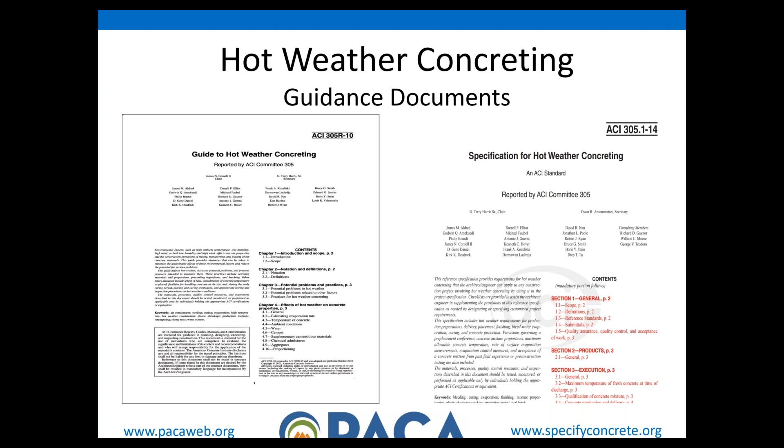What we based everything on here in the presentation, and what really is the guide, is the ACI publications 305R, Guide to Hot Weather Concreting, and 305.1, specifications for hot weather concreting. These are important documents. My advice to you, whether you're a producer, a concrete contractor, or a specifier, is the first time you're reading these documents should not be when you're preparing for a dispute and trying to get paid, or in a trial because you didn't do something right. Somebody once said, who reads these specifications? Well, only two people: lawyers and expert witnesses. So we've provided links to these documents. Of course, they're not easy to get to, but if you're doing something that's contrary to the guide, or somebody's asking you to do something that's contrary to the guide, it's good that you know where the answers are and what information we're basing all this on, where the state-of-the-art practice is coming from.

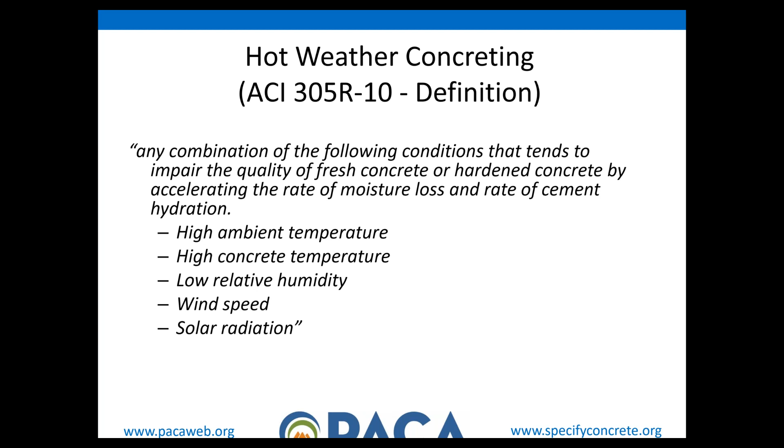So right from 305R, what's the definition of hot weather concrete conditions? Well, any condition that's going to impair the quality or change the performance of hardened concrete, including high temperature, high concrete temperature, really low humidity, wind speed, or a lot of sun. All those things are going to affect the concrete performance, how it performs, and what we need to do to address it properly.

Let's talk a little bit about the effect of high temperature on concrete. This is one of my favorite slides for relaying this information, both on hot weather and cold weather.

What you see here is the effect of the same mix being cured at three different temperatures for a total of a year, out to 365 days, all from the same concrete. They did this at a 0.43 water cement ratio, very typical of what you'd see in a 4,500 or higher performance mix, like a bridge deck mix. So this is relevant, real concrete.

What's important about this slide is to notice the shape of the curve. The shape changes when we get into that 73-degree range as opposed to 55 and 40 degrees. What that's telling me is that we are changing the mechanics of the chemical reaction that underlies cement hydration.

Now, cement hydration is not just one reaction. It's a very complex, multiple reaction with a lot of different stuff going on. If we wanted to put a webinar on that, we could put all sorts of chemistry up there, but that would be a webinar akin to being in a dentist chair for two hours going through all that chemistry. Hey, we're construction people, we don't like chemistry.

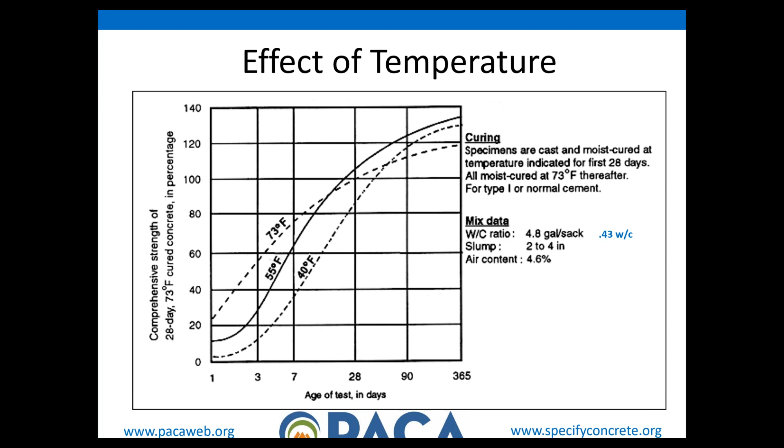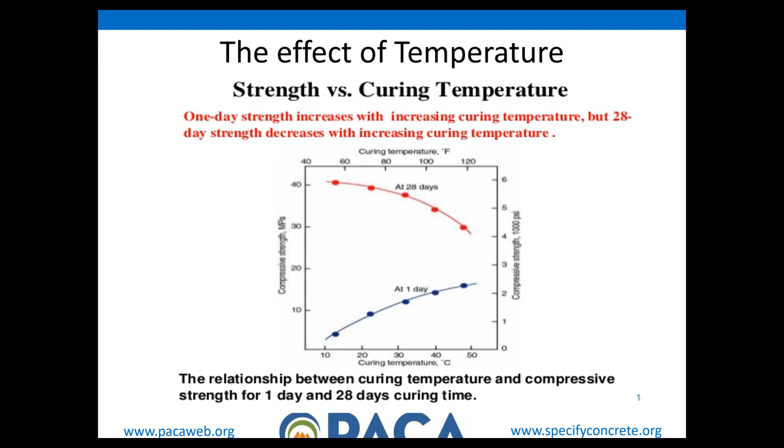Here's another way of showing the same kind of strength data. They say about strength of concrete, you want it early or you want it late. We can give you great strength at an early age by keeping it very warm, but we suffer 28-day and later strength by it. As you can see, the higher the temperature, the greater the 1-day strength, but the less the 28-day strength.

Now here's a very interesting slide, and let me see if I can do a little bit of notation on it. What you see in the brownish yellow color and in the blue color is the set times of two different mixes, both of the same proportions but with a different type of cement.

Notice that at 50 degrees here's our set time, and as we go to 73 degrees we get a much quicker set time, and as we go even to 90 degrees we have an even quicker set time. Same thing with this mix in blue, much faster setting time with a different type of cement, but as the temperature goes up, our set time goes down.

In addition to our set time, there's also something else that shortens or changes. Look at the difference between initial set and final set as our temperature increases. I'll asterisk that there, that's our time difference between initial set and final set.

Any even rudimentary finisher who's worked through the seasons knows that this window, our finishing window, changes as temperature is affected. So you see the finishing window here, and then it's even smaller here, and even less here as our temperature increases.

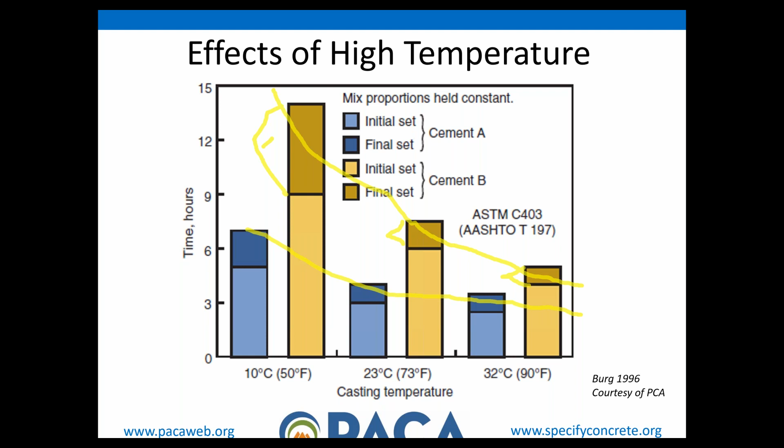So to me, this is showing another effect of temperature changing the mechanics of our underlying cement chemistry as it goes up. Let me get rid of these drawing tools, forgive me, I've got to erase all my drawings. So that's a little bit about the effect of temperatures on concrete.

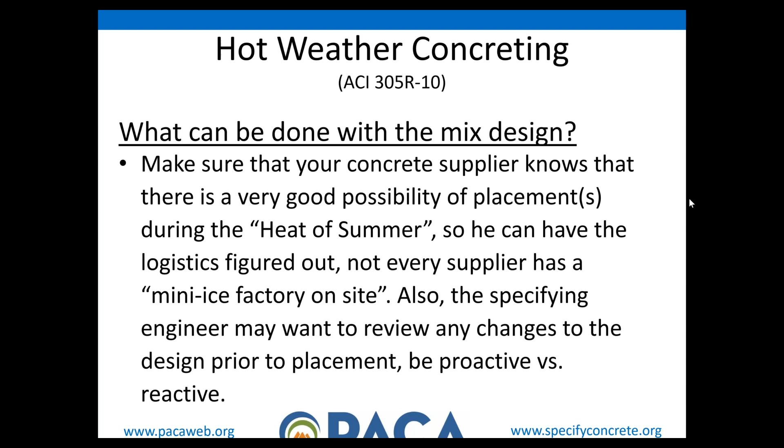Okay, we good, Jim? Looks good, Mark. Thank you. Okay, good afternoon everybody.

What can be done with the mix design? Well, not a lot, but there are some things you can do. I'll briefly go over some of these. The first slide I have here asks, what can be done? There's a little bit of tongue-in-cheek with that, as everybody can read, so I'm not going to read it for you. But the biggest thing, and Susan will touch on some of the challenges and logistics, is that summertime is a fickle time.

We have rain, as everybody's seen, and we have a lot of heat, and you're just not always ready. You get a call that you need a bridge deck here in 3 days. We got to ship a bridge deck. Not every supplier's got a little ice factory ready, so you have to have extra communication. You want to make a change, the specifying engineer is going to want to review it. So I just encourage everybody to be proactive, not reactive. I know everybody hears that same thing, but I truly mean it.

So moving along to our next slide, if I can get it to move along. There we go.

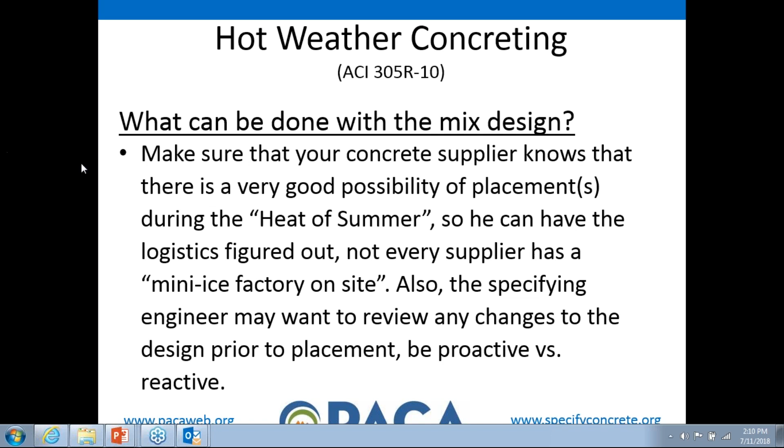What can you do with the meat and potatoes of the mix? Well, shrinkage is a problem, hot weather concrete's the problem, and they're related. The natural inclination is for everybody to add water, and that's done. Everybody in this business knows it's the kiss of death. By increasing your coarse aggregate volume, you actually require less water due to less surface area. It can really improve a mix, actually. Now, finishers are fickle people, and they don't like any more rocks in it than necessary.

So some of the other things we can do is use of chemical admixtures. They're the next best, and sometimes they even work in concert with the volume changes. They can really fill the bill.

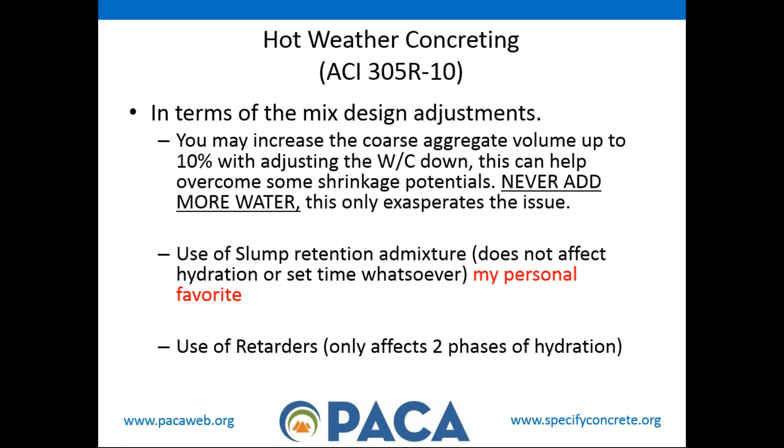Just want to point out slump retention admixture. It's a personal favorite. It does not retard the set of concrete. Okay, everybody, please understand this — it does not retard the set at all. A retarder, that'll affect the set of concrete, but retarders only affect 2 phases of the hydration.

There's a product called a hydration stabilizer. Everybody hears that, and some people think it's the same as a retarder. It is not. A hydration stabilizer can actually put your concrete to sleep for several days if need be. They're a more advanced product, used a lot, I guess, in pervious concrete, where you don't want things to set real fast.

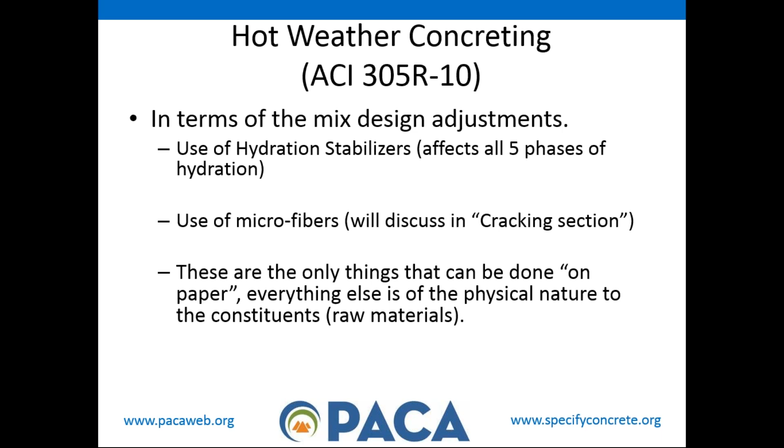Another item you can do with the mix design is use of microfibers, and we'll discuss that a bit in cracking further on. Microfibers or fiber mesh, or any of the other common names used, are really designed for plastic shrinkage cracking, and that's another issue we'll discuss further. So those are really the only things that can actually be done on paper.

Everything else is more of a physical nature or with the raw material. The raw material, first thing obviously is cement. Type 2 is good, there's a lot of 1-2s out there. Type 4 is the best, but you're not going to find that very easily, if at all. Jim, you or Susan can correct me — I don't know of anybody that currently has type 4 anywhere on the whole East Coast, do they? Not that I'm aware of.

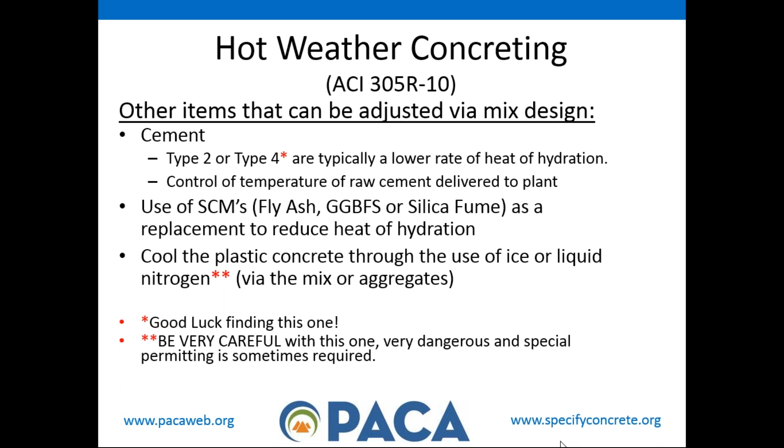Okay, so obviously that's a derivative of the heat of your mix, the cement. Getting extra warm cement from the mill causes an issue. If there's any way you can set tankers aside and let them cool down, that helps. The use of SCMs, supplementary cementitious materials — fly ash, slag cement, silica fume — they all help. And obviously cooling the concrete down, everybody's favorite is use of ice. Liquid nitrogen is one thing that can be used, but I would strongly caution people, if you've never used it, get somebody who has to work with you, because it is very dangerous. You can cause life-threatening injuries with it if it's not handled properly.

Okay, production concerns — I believe, Susan, this is where you kick in. Am I correct? It is. Okay, well, here she comes. All right.

You got it? Yes. Do you guys see my screen? Yes, we do. Yes. Okay.

Awesome. All right, production facilities and procedures should be capable of providing the required quality and quantity of concrete under hot weather conditions, at the production rates required by the project. Batching procedures under hot weather conditions do not differ from good practices under normal weather conditions. The plants and the trucks should be inspected and in good operating condition, and keep in mind that equipment breakdowns can be much more serious under hot weather conditions.

So a few things to consider when placing concrete in hot weather conditions: use materials and mix proportions that have a good record in hot weather. Reduce your concrete temperature, like Mark said, with ice, liquid nitrogen, or chilled water. Concrete consistency, and transporting, placing, and finishing are critical.

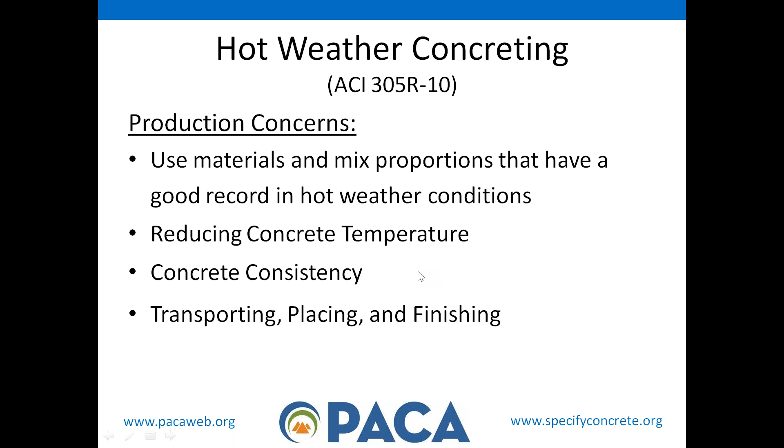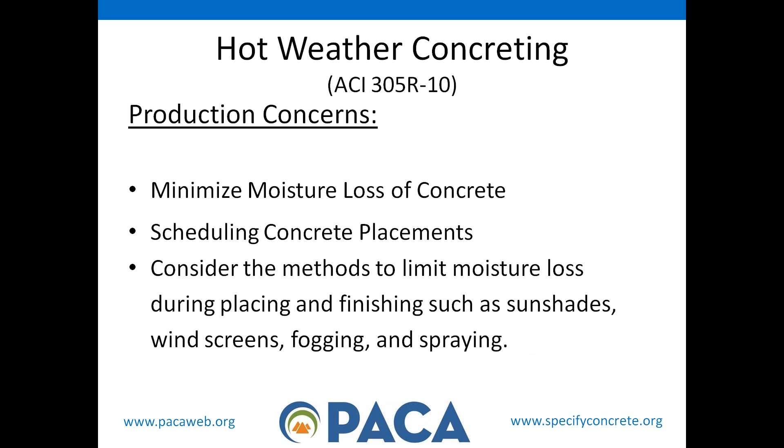We want to minimize the moisture loss of the concrete. We want to make sure that when we schedule the concrete placements, that it's done most efficiently. We want to consider methods to limit moisture loss during placing and finishing, such as sunshades, windscreens, fogging, and spraying.

To achieve a 1 degree decrease in the concrete temperature, if you cool one or more of these ingredients, you will see a drastic reduction in the concrete temperature. If you can reduce the cement temperature 8 degrees, you'll get 1 degree concrete temperature. Water temp 4 degrees down, 1 degree. But if you can reduce your aggregate temperature 2 degrees, you can get a 1 degree decrease for every 2 degrees of aggregate temp. So obviously that is the biggest bang for your buck.

Now the methods of cooling include using chilled water, ice, cooling the mixed water with liquid nitrogen, cooling the concrete with liquid nitrogen, or cooling the coarse aggregate with cool water or inundating the aggregate.

It doesn't hurt to cool the exterior of your mixing drums either when they're being loaded. In my case, I've got dark blue drums that just soak up the heat of the sun. So typically when we have a mixer under the bin getting loaded, we will have continuous water spray on those drums to cool them.

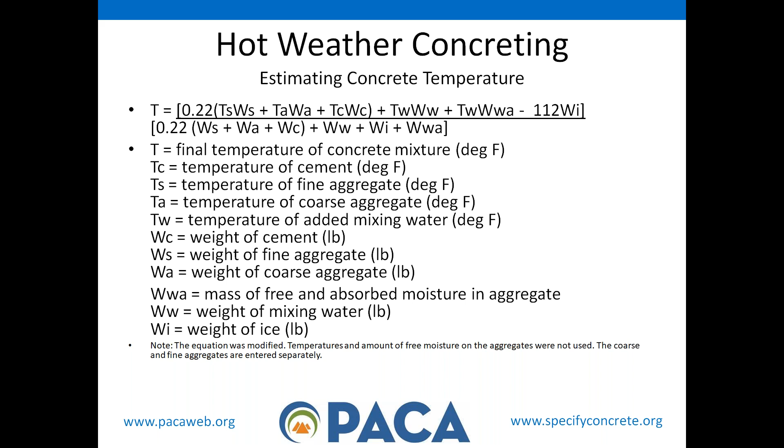The biggest thing is how much ice do I need, or how much do I need to reduce my concrete temperature? Well, here is the equation that ACI 305 has. It is rather complex. It has been converted into an Excel spreadsheet, but better yet, if you go online and Google estimating concrete temperature, there's quite a few programs out there that will do this for you.

Now we want to make sure we use a concrete consistency that allows rapid placement and consolidation. We want to ensure that the concrete mix is well graded and workable. Summertime is a notorious time when stone producers want to pull the 1/2 inch material out of the 57s to use in asphalt. So make sure you keep an eye on your gradations of the coarse aggregate.

Easy there, Susan. I know, Mark, but hey, we're talking the white stuff today.

The use of mid-range or high-range water reducers may be necessary to expedite the placement. Mixer revolutions at mixing speed should be held to a minimum to avoid unnecessary heat gain of the concrete. Make sure that the mixer drums are free of buildup on the fins and do not have excessive wear of the mixing blades. Do not stop the drum for an extended period of time.

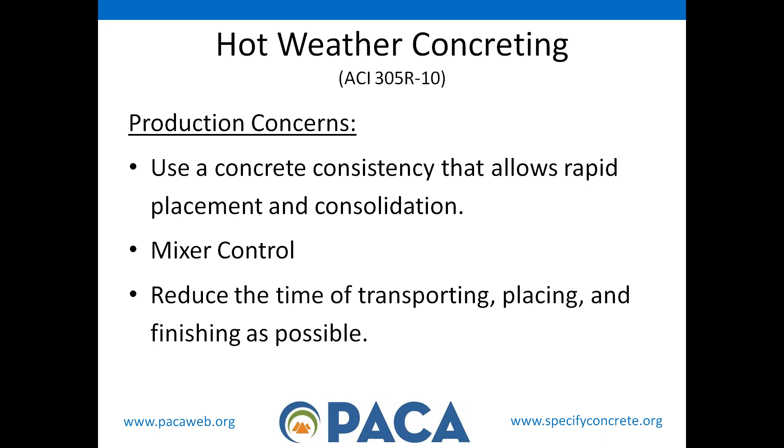There's a potential for a false setting problem, or you're going to flatten your mixer rollers. Schedule the concrete placement to avoid the extreme heat. It may be necessary to place the concrete at night or during more favorable weather conditions. Remember that your concrete supplier has limited resources and most cannot produce 24/7.

Now, Mark touched a little bit on slump control, but slump control is critical. It's not unusual to hold water while you're batching, but you should take care to avoid withholding too much water from the batch, as this could result in inadequate mixing, dry packing that reduces the effectiveness of the admixtures, or delivery of a slump below the specified minimum.

Set retarders can be used to extend the workability of the concrete, but make sure the contractor is aware if a set retarding admixture is being used, because protecting the concrete in the field is even more critical at that point. Set retarding admixtures improve workability, reduce segregation, provide superior finishing characteristics for flat work and cast surfaces, allow for flexibility in scheduling, placing, and finishing operations, offset the effects of early concrete stiffening during extended delays between mixing and placing. They also help eliminate cold joints.

They'll lower peak temperatures and/or rate of temperature rise in mass concrete, thereby reducing thermal cracking. They will also increase compressive and flexural strengths.

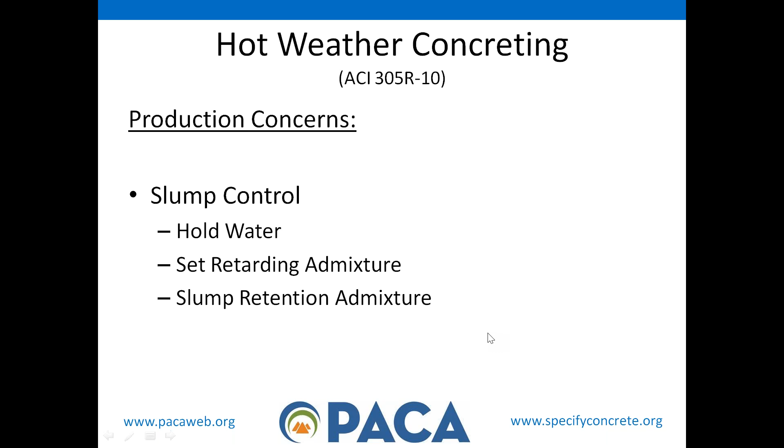Now we're out on the job site. If you fail to plan, you're going to plan to fail.

Plans for hot weather concreting should be made to minimize the exposure of the concrete to adverse conditions. Whenever possible, slab placement should be scheduled after the roof structure and walls are in place to minimize drying winds. A roof also reduces thermal shock from rapid temperature drops caused by wide day and night temperatures, or cool rain on concrete heated by the sun.

Monitor the weather to increase awareness of potential issues at or during the placement. Those scattered afternoon thunderstorms aren't uncommon this time of year and can wreak havoc on an exposed floor slab. Be aware of damaging combinations of high air temperatures, direct sunlight, drying winds, and high concrete temperatures.

Concrete placements should be scheduled to avoid the hottest portion of the day. It may be possible to place the concrete at night or during more favorable weather conditions. The hottest part of the day usually occurs between 3 and 4 p.m. Cooling doesn't typically start until after sunset, which in the summertime is around 9 p.m.

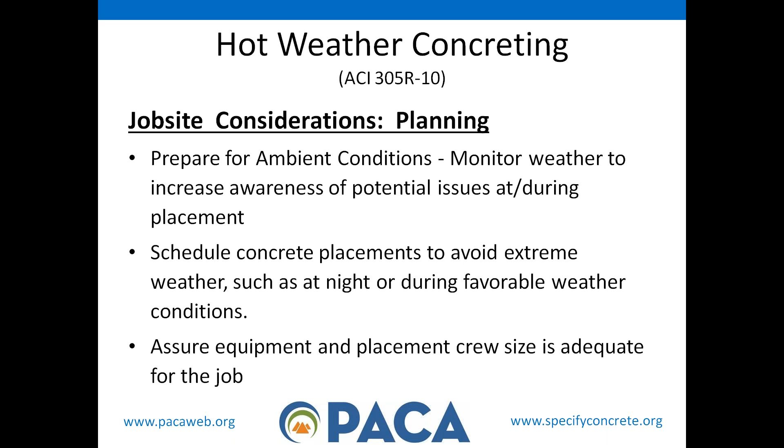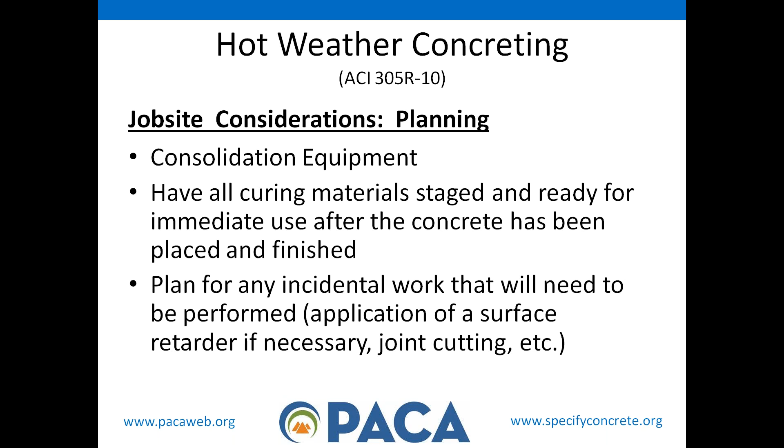Preparations should be made to transport, place, consolidate, and finish the concrete as fast as possible. Equipment for placing the concrete should be of suitable design and ample capacity to perform this efficiently. All equipment should have adequate power for the work and be in top operating condition.

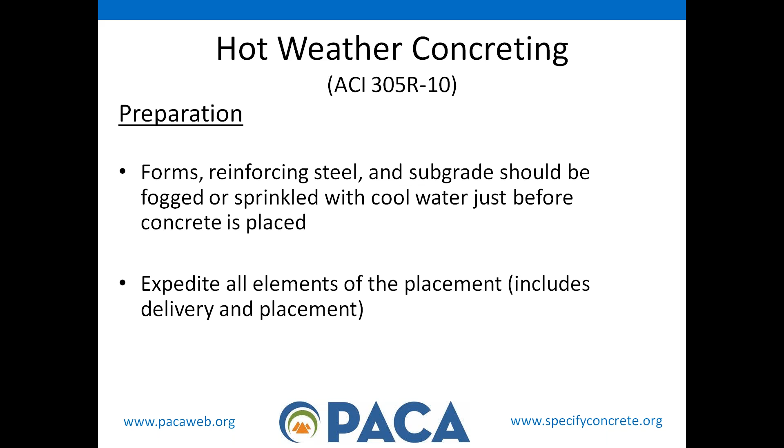Cool the forms, reinforcing steel, and the subgrade before you start placement. Restrict placement of the concrete to the early morning, and expedite all elements of the placement, including delivery and placement. Site traffic should be coordinated for quick turnaround of mixer trucks. And if you're pumping, it's extremely advantageous to have space for 2 trucks at the pump hopper.

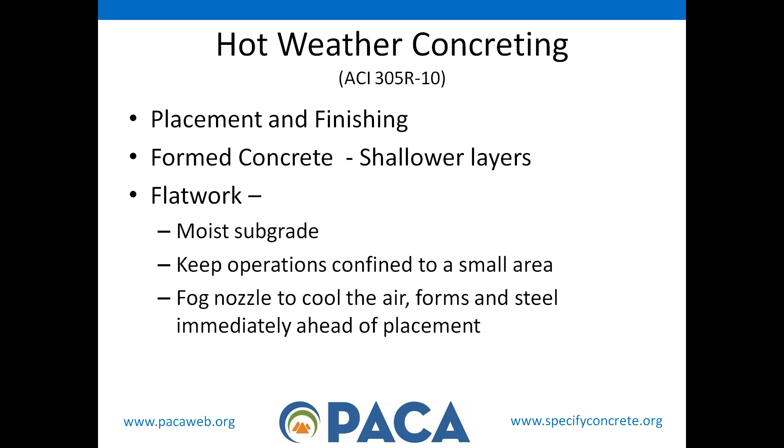In hot weather, it is necessary to place the concrete in shallower layers to ensure coverage of the lower layer while it still responds readily to vibration. For flat work, the subgrade, forms, and steel should be moistened, but keep the operations confined to a very small area and use foggers to cool the air, forms, and steel immediately prior to placement.

Can't stress this enough: curing is critical. In hot weather, curing and protection are critical due to the rapid moisture loss from fresh concrete. Curing actually starts before the concrete is placed, by wetting the substrate surfaces with water.

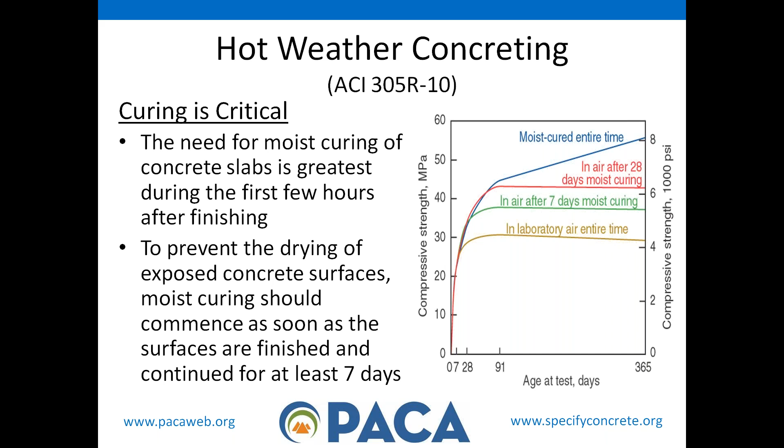But what do we really mean by curing? Well, curing is the maintaining of an adequate moisture content and temperature in the concrete at early ages so that it can develop the properties in the mixture that it was designed to achieve. It begins immediately after placement and finishing so that the concrete may develop the desired strength and durability. You cannot get away with minimal or no curing in hot weather.

Wet curing, the old way, is the best. And as much as we would love to see water cured for 28 days, it's not always practical. Try to push for water cure as long as feasible. It will produce the strongest and most durable concrete.

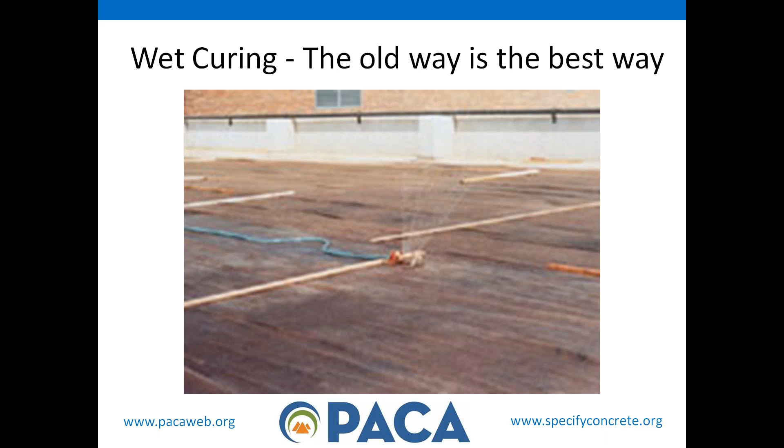There are 3 functions of curing. We maintain the mixing water in the concrete during the early hardening process. We reduce the loss of mixing water from the surface of the concrete, and we accelerate strength gain using heat and additional moisture.

At this point... oh no, it's still me, isn't it? Membrane curing. Yeah, you have 2 more, I think.

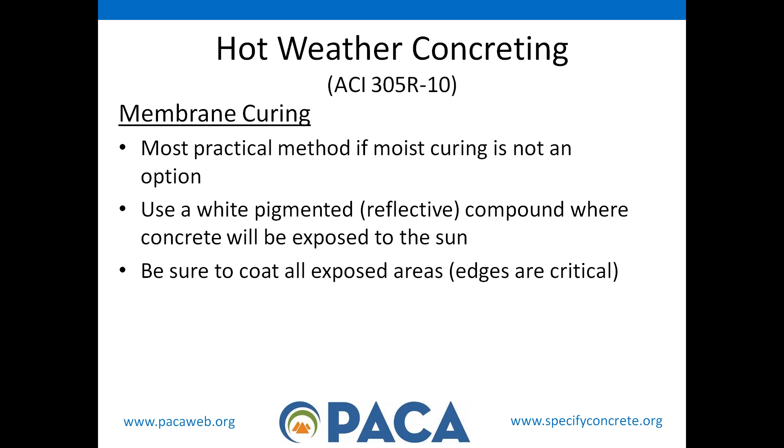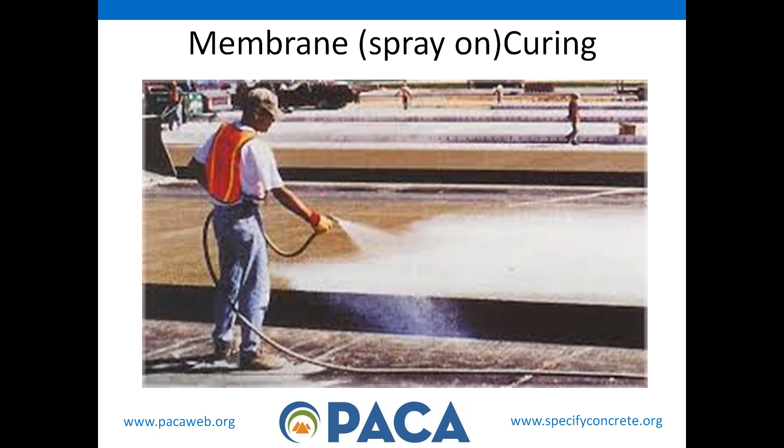Yes, I do. It is the most practical of all curing methods, the next best thing to water. Membrane-forming curing compounds are usually used to retard or reduce evaporation of moisture from the concrete. They can be clear, translucent, or white pigmented. In hot weather, it is recommended to use the white pigmented compound to reflect the sun. Be sure you coat all exposed areas. Do not forget the edges.

And here is a good example of somebody spraying on the pigmented white curing compound.

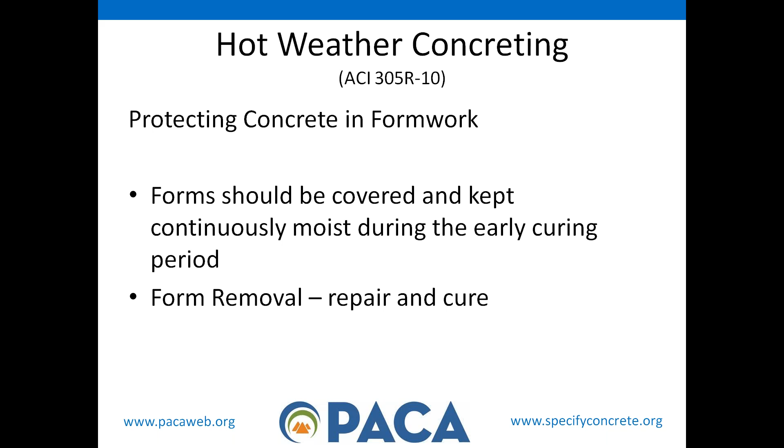Forms should be covered and kept continuously moist during the early curing period. Formwork should be loosened or removed at the earliest practical age without damaging the concrete, and provisions should be made for an approved curing method to begin. So just when you strip the forms, it doesn't mean you're done. This is when it is more critical - you have to make sure you come back and cure the structure.

Now I think it's Mark's turn. Yes, it is. Thank you, Susan, for running us through what we need to do with the plant and things we have to worry about on the job site.

Well, the first one obviously is one that everybody sees: cracking, whether it's dry cracking or plastic shrinkage cracking. Now, plastic shrinkage cracks are entirely different than dry shrinkage cracks. I'm going to go over the dry shrinkage cracks first, then work myself into the plastic. The biggest difference is the plastic cracks occur while the mix is still plastic, not completely set yet. Typically the cracks for plastic don't go much more than 1/4 to 3/8 of an inch deep.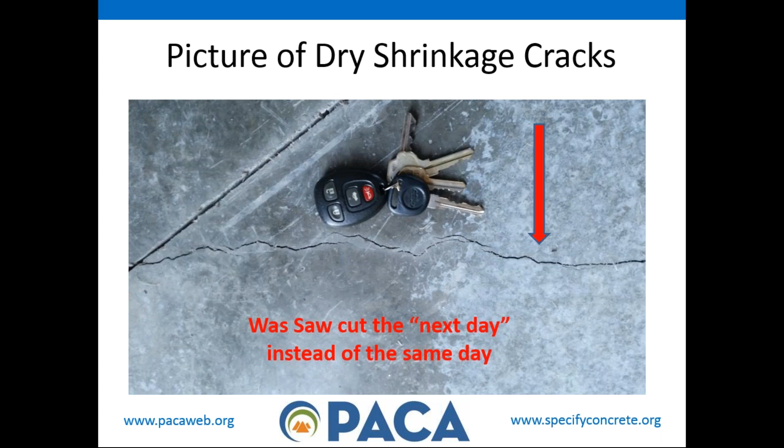Picture of dry shrinkage cracks. We're back to the cracking. Everybody's going to a finisher or a project and says, yeah, I saw cut it the next day. Well, it probably needs to be cut the same day, especially in hot weather. You could probably get away with the next day in a cold weather application, or with a mix that was really slow setting. But if you wait till the next day, Mother Nature's already put the crack in there for you, and it's a fully functioning joint. It doesn't look pretty and people get upset, but this is what happens.

Plastic shrinkage cracking, as I touched on briefly, typically happens early on in the setting process, but I want to mention it does occasionally happen in cool and cold weather also. A lot of things combine to cause that, as we mentioned, rapid moisture loss, which you can have in cool and cold weather as well. But the conditions are really what dictate it.

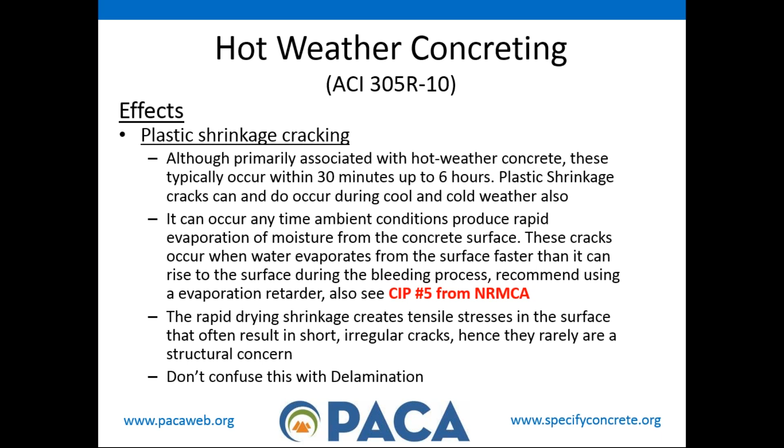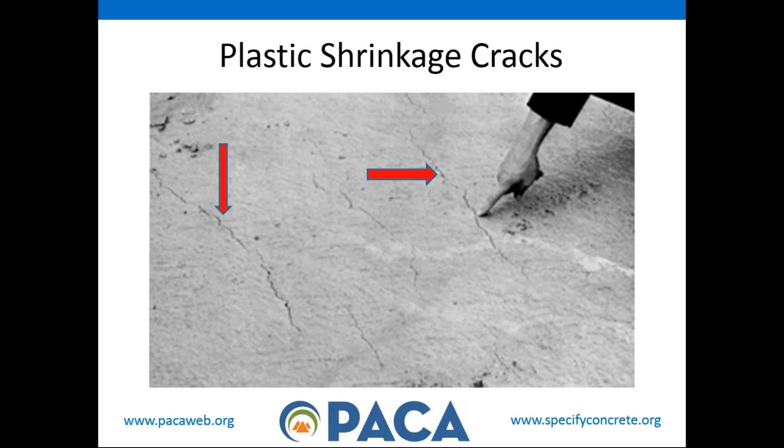I have a plug in there for Concrete in Practice number 5 from NRMCA. And please, when you see the plastic shrinkage cracking picture I'm going to show next, don't confuse this with delamination - delamination is a completely different thing. There's a picture everybody's seen time and time again of plastic shrinkage cracking, and nothing can be done about it. There are finishers who will try to get back on the slab and get it sealed up or healed up, and that's where delamination occurs, because they're putting water on the surface or trying to scrub some grout into it. Basically, when the bleed water works its way through, the damage is already done.

This is a really nice graph used to determine probability of plastic shrinkage cracking. If you have the humidity, the concrete temperature, and the wind velocity combine to greater than 0.2, you're going to have problems. If you don't have an evaporation retarder that Susan mentioned, like a Confilm or Evapre, you're going to have an issue with plastic shrinkage cracking.

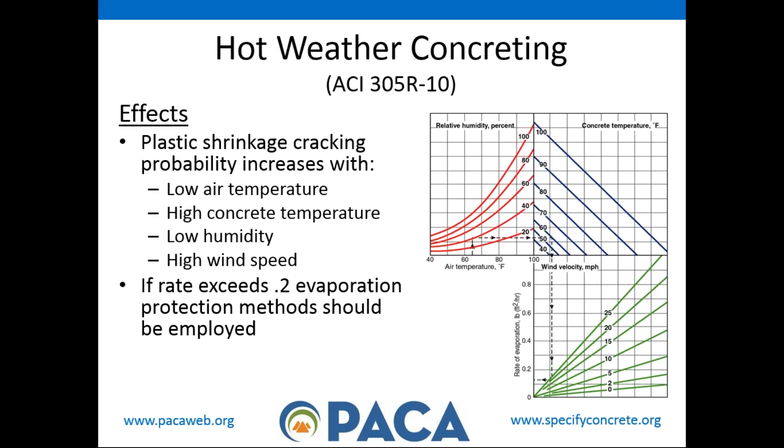So how do I know if I'm apt to this? Well, there's several apps. Several PACA member companies have apps you can go online and get, plug in your location based on zip code, and it'll tell you the weather conditions and if maybe you're in a bad situation.

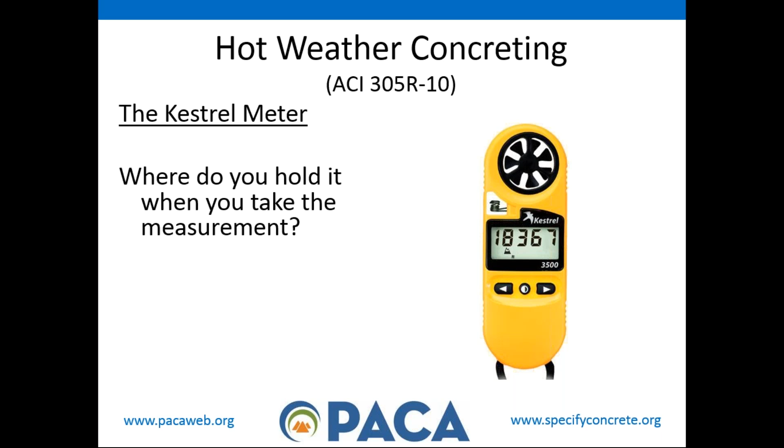This is a Kestrel meter. Anybody who's done PennDOT work and bridge decks has seen this. You basically hold the back of the unit into the wind. If you hold it off axis by like 5 degrees, it'll reduce the accuracy by 1%. For the most part, you hold it into the wind and take a reading, and it'll tell you approximately your evaporation, what you're going to be losing. For a large commercial placement, a guy can put this in his back pocket, no different than a cell phone, and check it every 15 to 30 minutes, because weather conditions change.

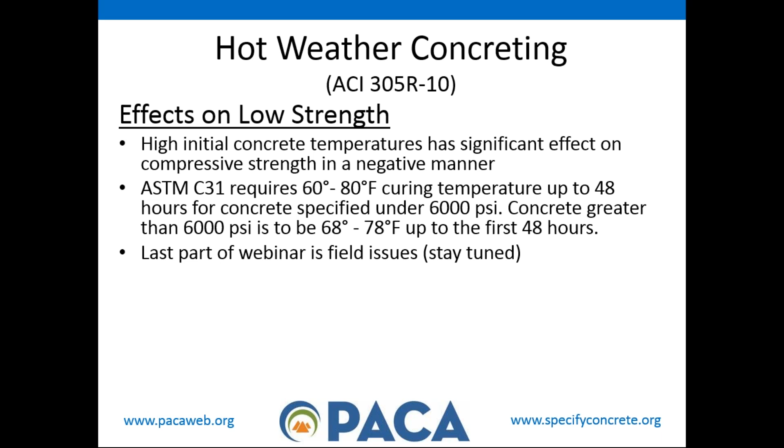Effects on strength. We're going to get away from cracking and talk about what can happen to the strength. We've touched on that, but I have to put this in here because of curing. As a reminder, ASTM tells you the curing temperature requirements for specified strength under 6,000 and above 6,000 psi. If you don't adhere to it, you're going to have issues.

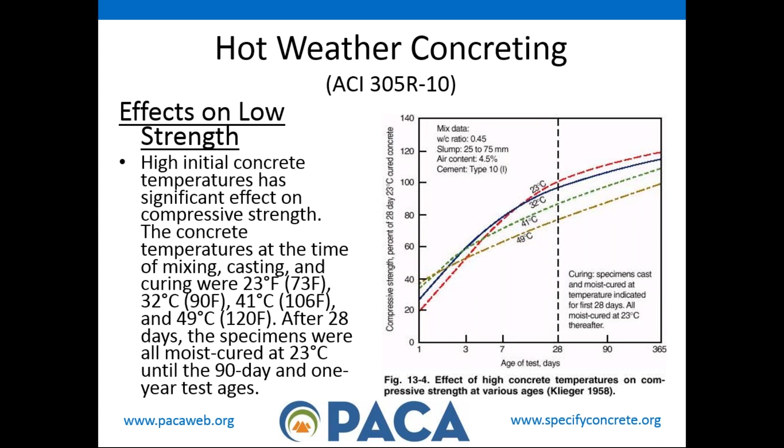Another nice chart, like Jim and Susan both showed. We can't show this chart to you people enough, so please feel free to share it with your contractors, whoever can learn something from this. This is real stuff.

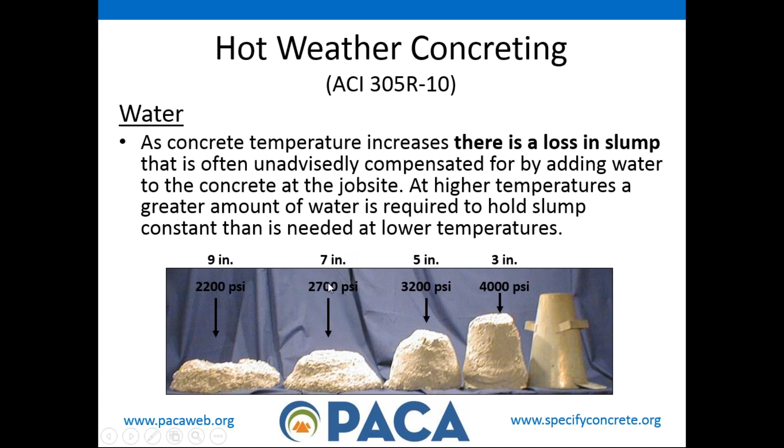We mentioned water, about putting too much water in. Look at the strength loss just based on adding water, from a 3-inch slump designed at 4,000 psi, now up to a 7-inch slump with water added. Look how much you lose there, 1,300 psi. You can never get that back, not to mention the curling and cracks you'll incur.

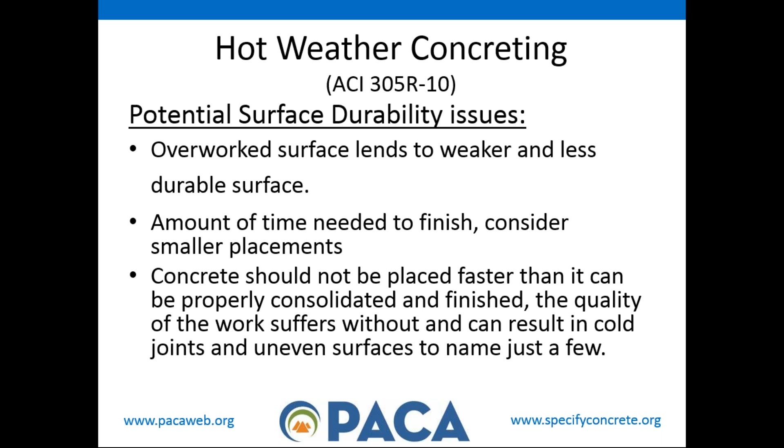Durability issues, another issue with hot weather concreting. Overworking the surface - everybody worries about getting a beautiful surface. You've got to get it sealed up faster, get more people there, and consider the amount of time needed to do it, or consider a smaller placement. You don't want to end up with cold joints, and you don't want the work to suffer. Those are just some of the many things.

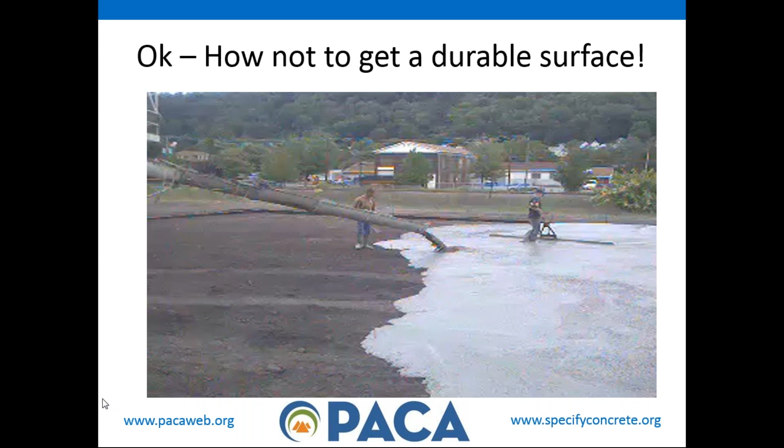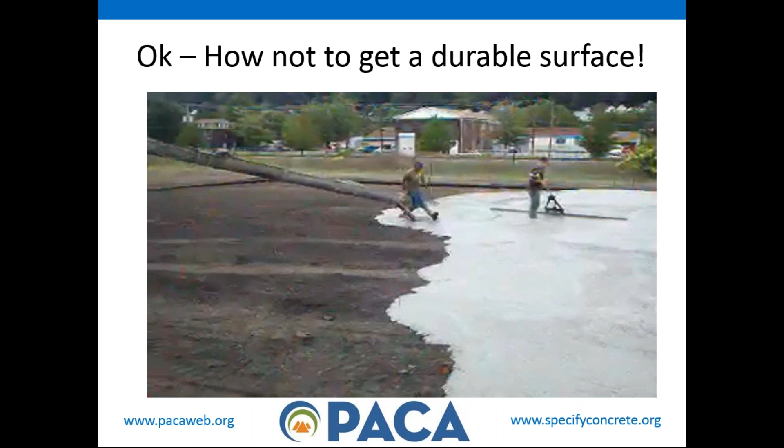This is a video, I don't know how well it's going to play. One of our attendees took this video several years ago. This is guys pouring in warm weather - I believe it was 50, 60 yards of concrete, 2 guys by themselves. I'm going to let this play for a few more seconds. These are just guys that needed to pour it wet because they didn't have enough help, and they backed themselves into a corner.

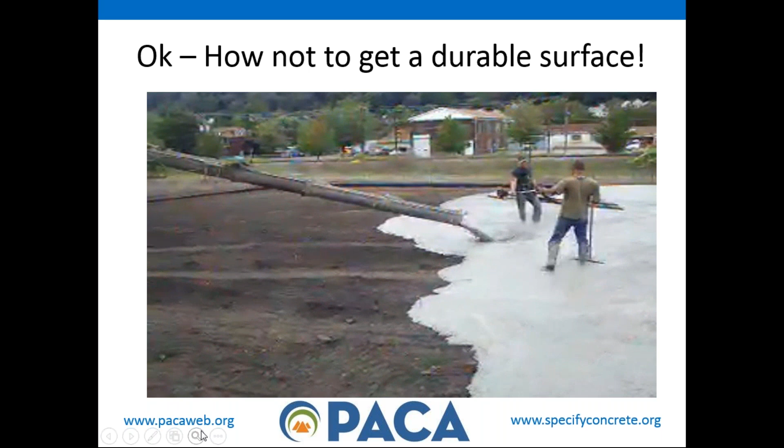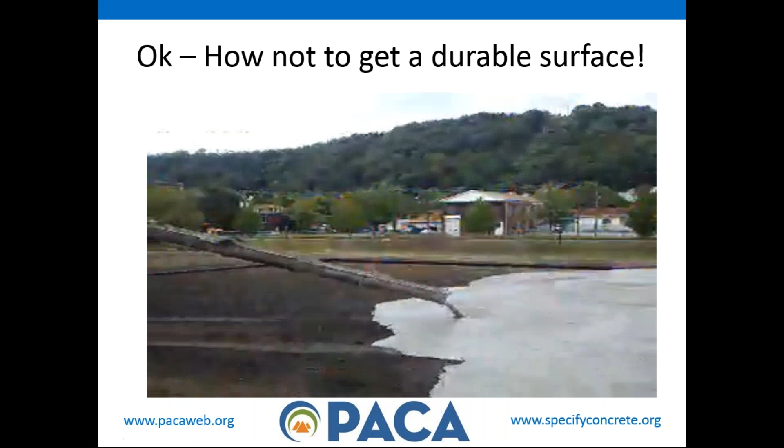They had no issue with us filming this. You can see how wet it is. And just for the record, that is not Super P in that mix - that is all water slump. As you can see, as the coarse aggregate hits it right here, it disappears, sinking to the bottom. This will most certainly fail. So I'm going to stop that and move us on to the next one.

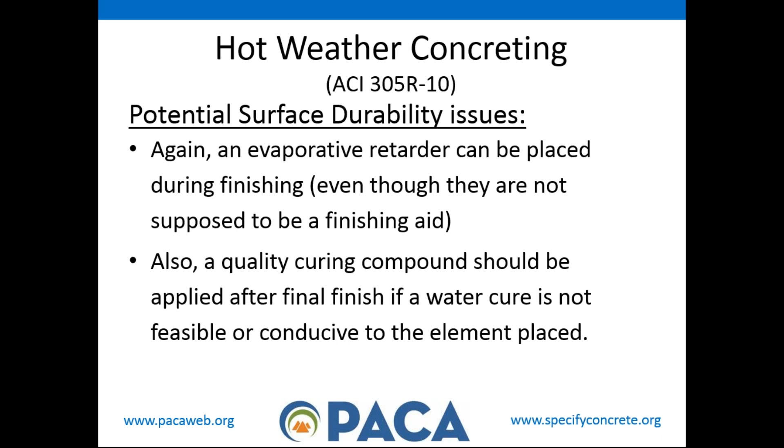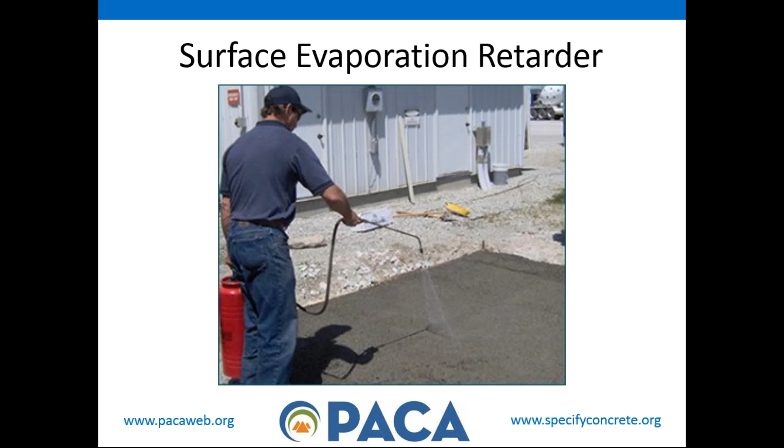Other surface issues - again, use an evaporation retarder, can't stress that enough, not enough people use it. I know it's not supposed to be used as a finishing aid, but let's be honest, it's better than putting water on the surface. Then use a good curing compound after the final finish. As Susan mentioned, good old-fashioned water is the best thing, but if it's not feasible, use a good quality curing compound, then seal it - the guy putting some Confilm on.

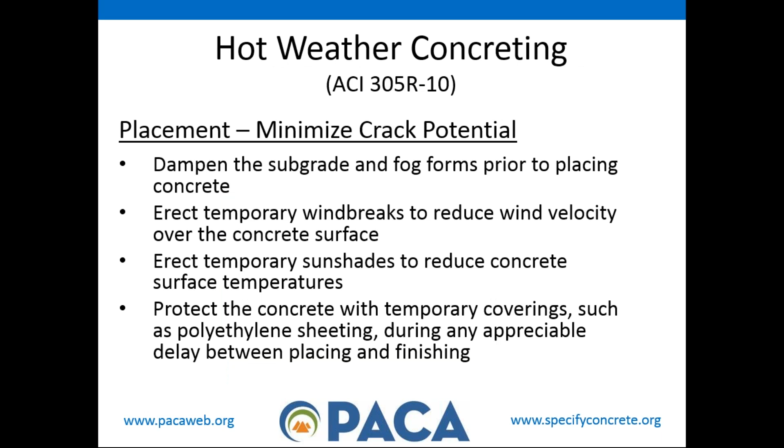Placement, minimizing crack potential. Some of the things Susan mentioned as well: making sure the subgrade is good and wet, wind breaks, sunshades, all the things you can possibly do. Fog the slab. PennDOT generally requires you, at least in some districts, to have a fogging machine right on the bid well to keep the percent humidity high enough so you don't have issues with your Kestrel meter. And of course, plastic fibers, the microfibers, can certainly help with plastic shrinkage cracking.

And obviously the last thing is reducing the amount of time between placing it and finishing it. Got to do it quick.

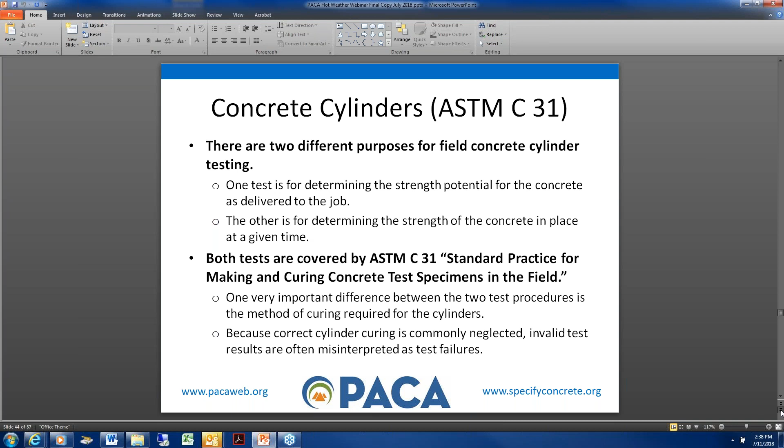So the first type is standard cure cylinders. The purpose of this cylinder test is to confirm that the strength of the concrete as delivered to the job meets the specified design strength, typically at 28 days. During the first 24 hours, all cylinders are stored in a surrounding temperature of 60 to 80 degrees Fahrenheit for less than 6,000 psi concrete, and 68 to 78 degrees Fahrenheit for strengths greater than or equal to 6,000 psi. Within 16 to 24 hours, all cylinders are removed from the molds and stored in a moist condition until time of test at a temperature of 73.5 plus or minus 3.5 degrees Fahrenheit, which we do in our controlled temperature laboratory and controlled temperature tanks in our office.

Field cure cylinders: the second purpose of cylinder testing is to confirm that at the time concrete in place is strong enough for forms to be removed, or for the structure to be put into service. Cylinders are stored as near as possible to the concrete in place. Cylinder molds are removed at the time the forms are removed. Cylinders are cured to duplicate the curing of the concrete in place until the time of test. I just want to emphasize that field curing cylinders is not used as a basis for strength acceptance of the concrete — it's only for the items I referenced here.

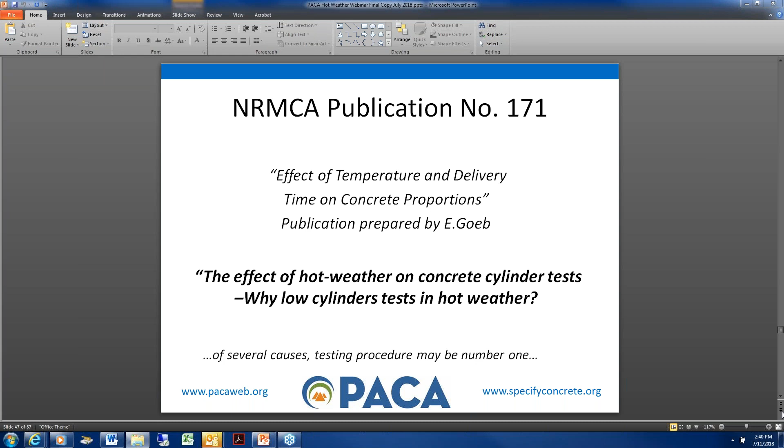Two of the three primary variables investigated were the effect of concrete temperature and the effect of delivery time on 28-day cylinder strength. The higher concrete temperatures caused only a minor reduction in 28-day strength in the study. The reduction in strength when delivery time was extended from 20 to 90 minutes was 2 to 3 times greater — a much greater effect than higher concrete temperature itself. Loss in strength from extended mixing time was no greater at 95 degrees than at 65 degrees. But the third variable, the temperature at which the cylinders were cured on the job, had the far greatest effect on cylinder strengths.

Cylinders molded from various mixes were exposed to two different curing conditions for the first day. One set was cured for the first 16 to 20 hours at 70 degrees, and the other set was cured at 100 degrees Fahrenheit. After the first day, both sets were cured in the standard moist room condition. The loss of strength by early exposure of cylinders to 100 degrees Fahrenheit averaged 10% of the 28-day strength for all mixes. This was double the loss that occurred with longer delivery time, and almost 6 times the loss of strength that occurred with higher concrete temperature.

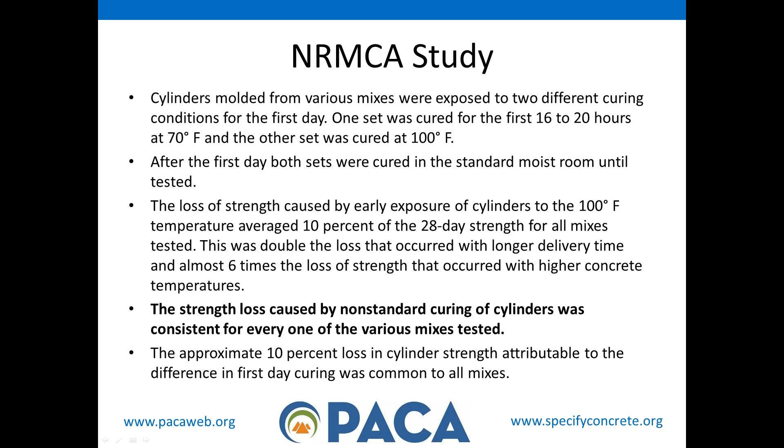The strength loss caused by non-standard curing of cylinders was consistent for every one of the various mixes tested. The approximate 10% loss in cylinder strength attributable to the difference in first-day curing was common to all the mixes tested.

Based on the test results, it was not difficult to speculate about what happens on many projects where cylinders stand unprotected from the sun. Ambient temperatures need not be extremely high for temperatures to reach 100 degrees Fahrenheit in direct sunlight. If exposure for one day can reduce 28-day strength by 10%, what happens to cylinders molded from a Friday pour or the day before a holiday?

In both those instances, we recommend that we pick them up the next day if the people we're working for will allow us to. We've always known and accepted the generalization that hot weather reduces concrete strength, as we saw earlier in this presentation. This report provides evidence that the major part of the loss is often not in the potential strength of the concrete mix as delivered to the job, which the cylinder test is supposed to be measuring. It is the loss in cylinder strength caused by non-standard curing of cylinders while on the job.

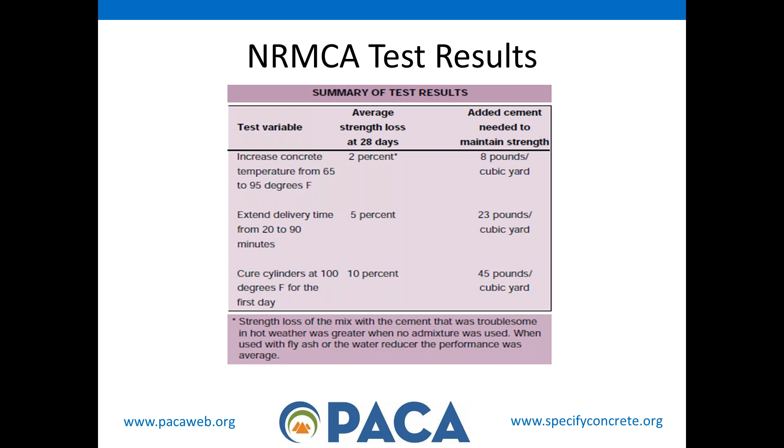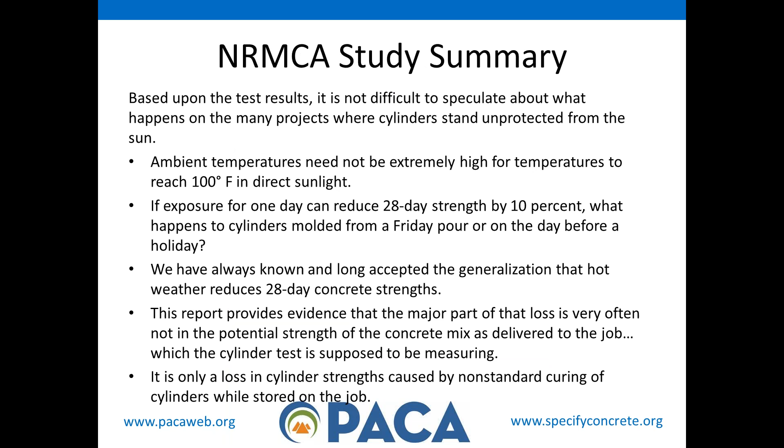A summary of the test results is shown in this table, showing what happens when you increase the concrete temperature from 65 to 95 degrees, extend the delivery time from 20 to 90 minutes, and cure cylinders at 100 degrees Fahrenheit for the first day. This study showed that curing cylinders improperly was giving us the greatest strength loss at 28 days. Looking into ACI 305R, it reiterated that if the initial curing is at 100 degrees, the 28-day compressive strength of the test specimens may be up to 10 to 15% lower than when cured at the required temperature.

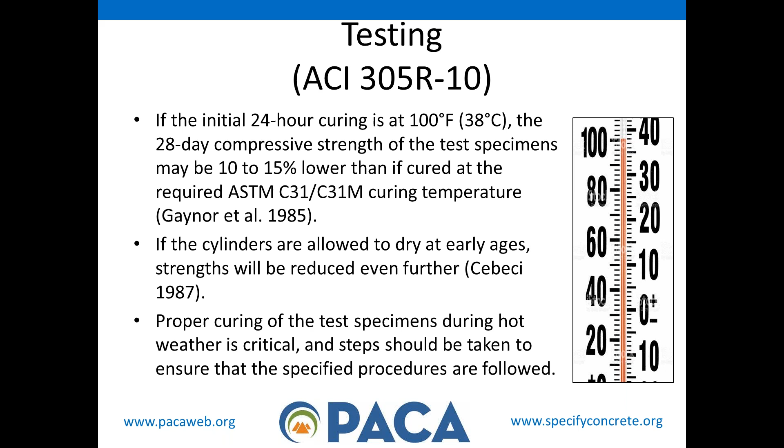If cylinders are allowed to dry at early ages, strengths will be reduced even further. So proper curing of the test specimens during hot weather is critical, and steps should be taken to ensure that the specified procedures are followed.

So what do we consider when we take all these variables into account? Carefully read and understand project specifications. A pre-construction meeting can address hot weather concrete practices. Susan and Mark talked about temperature control at the plant and on site, whether they have an ice factory or chilled water. You can discuss all this at the pre-construction meeting, along with the contractor's responsibilities and expectations, the supplier's responsibilities and expectations, and the testing lab's responsibilities and expectations. And you can prepare yourself, as Susan said, for the ambient conditions you're going to be performing in.

So what else can you do? You can frequently document the air, concrete, and subgrade/subbase temperatures, the humidity, wind, and evaporation rate. If your testing frequency is every 50 cubic yards, maybe you increase your temperature testing to every other truck, or do slumps every other truck. Maybe you provide more information so you can deliver a better product. Document placing and curing procedures. All these notes should be part of your permanent records, and make sure you collect and review the material delivery tickets.

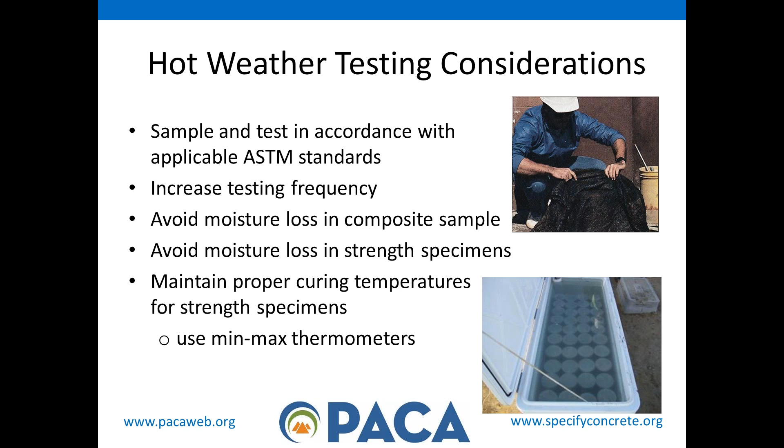As you see, there is a cooler filled with water with test specimens in it, and in our mind, it's a very easy way to cure the cylinders because it's easy for us to move a cooler around. We can control temperature a lot in that cooler—in wintertime, the lid might be fully closed or slightly ajar; in summertime, we may leave the lid open and just cover it with wet burlap. We're going to try to do whatever we can to maintain that temperature in the 60 to 80 degree range for under 6,000 PSI concrete.

You want to keep it cool. You know you have all these big shade trees in the middle of your job site, so make sure you use those. Cover your plastic molds with watertight lids, or use wet burlap. Total immersion in water is the best curing method for cylinders cast in plastic molds—one study has shown it's the only method that prevents all moisture loss during initial curing.

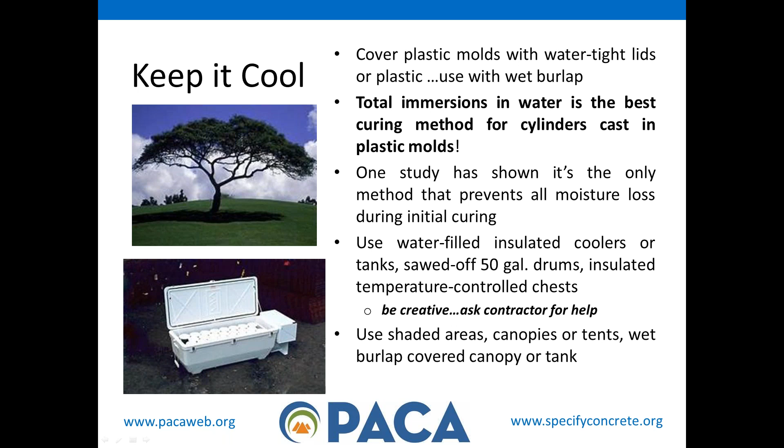Don't assume that because you're out there by yourself taking your cylinders, it's your responsibility. It is, but you can ask someone else that has their neck into the game, someone that's going to make sure the strength comes up. Maybe you can get assistance on the job site for materials to help keep your cylinders cool. Use shaded areas, canopies or tents. Wet burlap covering a canopy or tent will work also.

Summary: never place cylinders where direct sunlight can hit them. In hot weather, radiant heat combined with the heat of hydration will most likely drive the cylinder temperature above 80 degrees, which can reduce 28-day strength.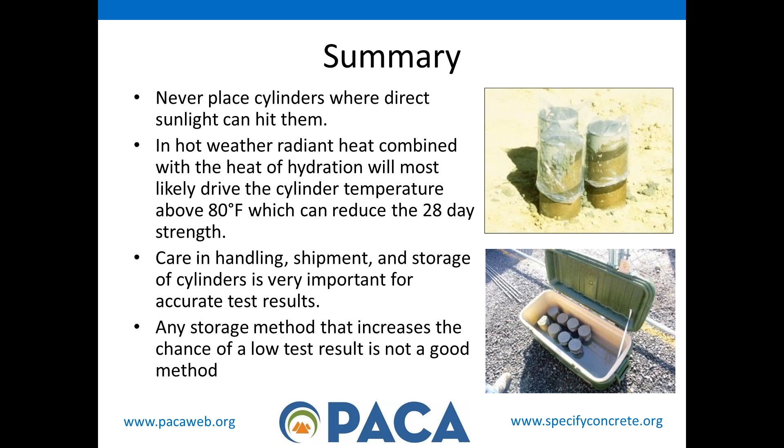One of the things we emphasize in this presentation is that the cylinders we standard cure in our lab are meant to represent the concrete placed in the field. If we are not curing those cylinders correctly, there's no way they can represent the concrete placed in the field. Care in handling, shipping, and storage of cylinders is very important for accurate test results. Any storage method that increases the chance of a low test result is not a good method.

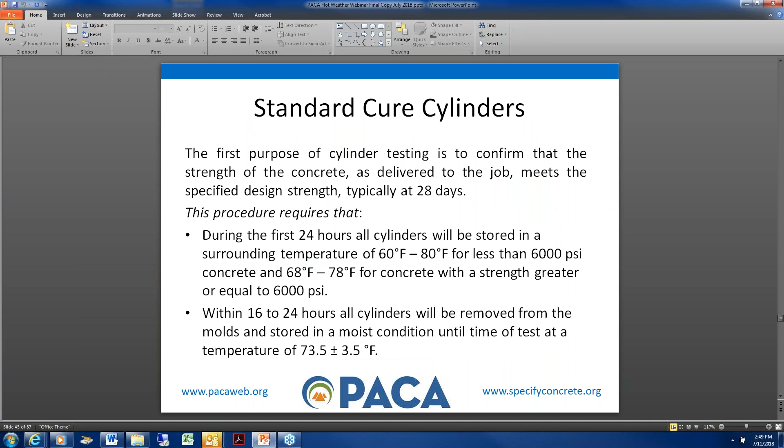Hey Jim, there's one thing I wanted to mention: crusting occurring during hot weather concreting. A lot of people will use retarders, and you have to realize you have to maintain the moisture on the top of the slab so you don't get crusting while using a retarder.

That relates to one of the questions I saw come in, about the surface evaporation retarder that helps with that. Now Mark, you mentioned that. Can you elaborate a little more on that product, as to when you can use it and how you use it? Well Jim, it's supposed to be used prior to the final finish.

It's supposed to be used as often as needed, and each manufacturer has their own spin on it. But as Pat alluded to, you do get crusting with retarder, and if you don't use it, you will almost guaranteed have plastic shrinkage cracks. So everybody be forewarned, there's a lot of inherent risk using retarder. There's a lot of good about it, but there's a lot of inherent risk. Like I said, it all kind of meshes together. Hot weather, cracking, all these kinds of bad things happen, all these extremes.

But it needs to go down. I know it's not supposed to be used as a finishing aid, but if you're going to put it down versus water to get something somewhat closed up, use it there, or use it after the final finish, as soon as you're done. I don't think you can use it as an intermediate curing, but you could certainly put it down prior to putting the curing compound down. It'll hold, based on certain manufacturers, sunlight and wind speed and everything - some hold longer than others. So I think a good rule of thumb is, as Susan and Rob and I have all mentioned, in hot weather, get it down, get it struck off, get it finished, get it cured immediately. Sorry, I went a long way around to get to there, but yeah.

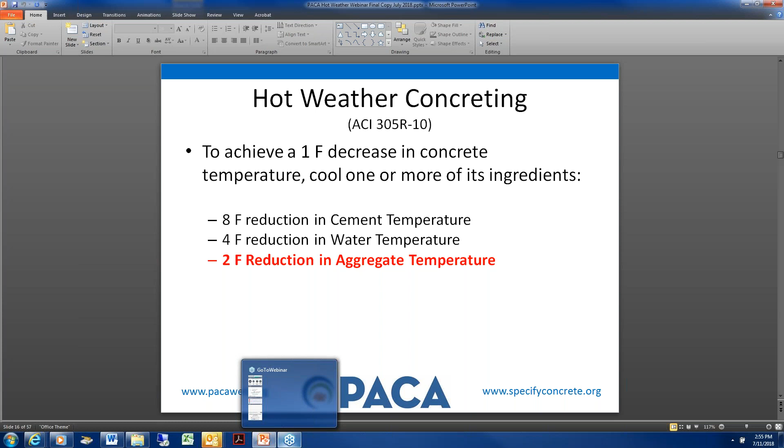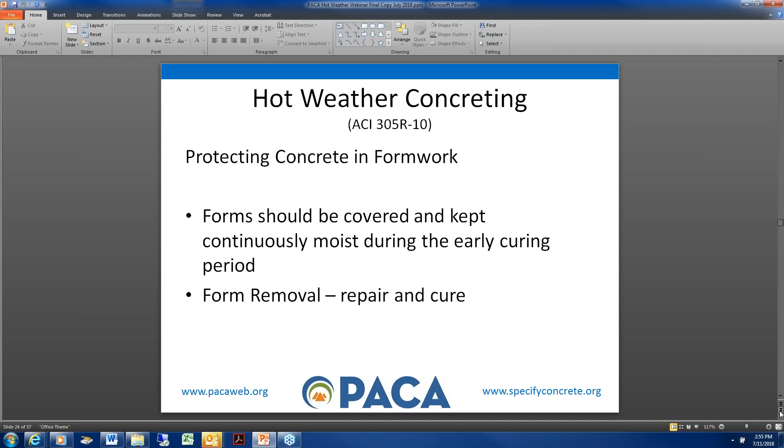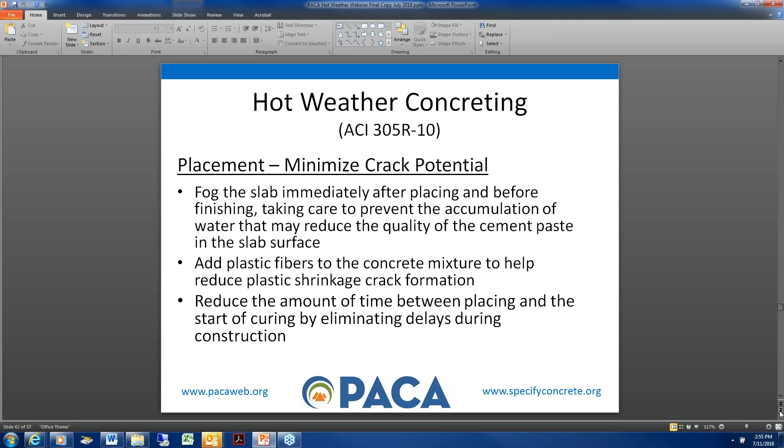We were working on a project with 2 different contractors. One was having cylinder issues, the other one was not. Same mix, delivering the same day. Difference is one was curing the first 24 hours in water. The second just had them sitting there in the black molds with caps on, and 2 feet from a pile driving machine.

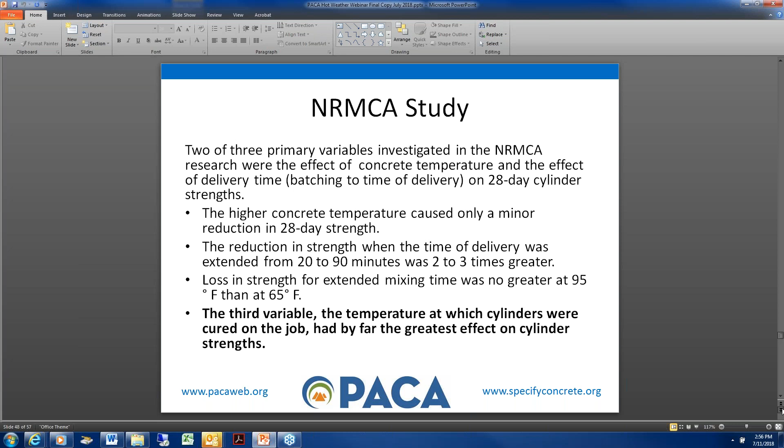And if you remember, at one of our technical committee meetings, someone was talking about how if you don't get your cylinders immediately in the water after molding, if you're waiting 15, 20, or half an hour, the spike in heat in the cylinders adversely affects the 28-day strength if it peaks real high in those first moments before you get them molded and into the water.